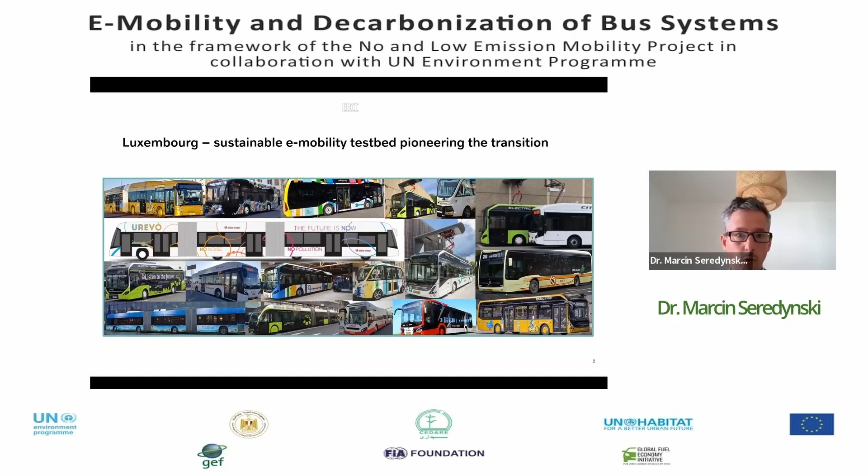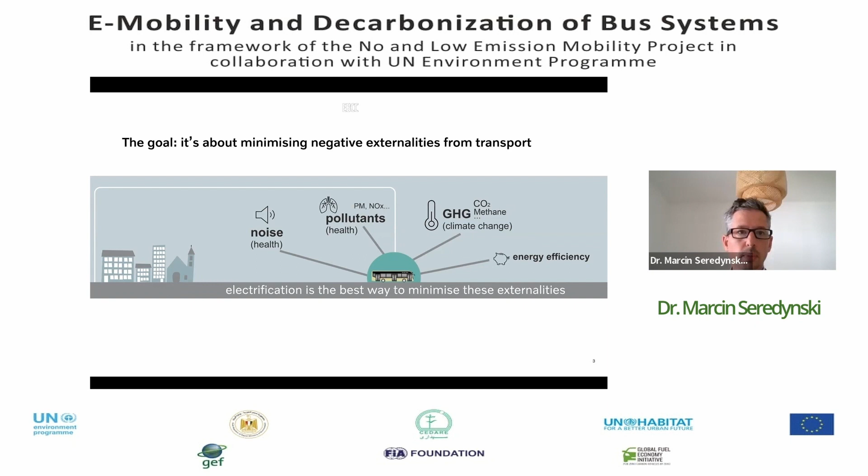So the first question that we asked ourselves is really, what is the purpose of using taxpayers' money for these newer, more expensive technologies? Of course, the answer is that it's really to minimize the externalities from transportation. So it's noise, pollutants, greenhouse gas emissions, and to improve overall energy efficiency. Each of these externalities has a slightly different meaning, but today we know that battery electric vehicles are the one and only best solution really to address them.

However, there's a quick note about tailpipe emissions, because there is a lot of confusion. If we talk about tailpipe emissions, then there is a huge improvement which comes with Euro 6 legislation. This means that Euro 6 diesel vehicles are already very, very low emission vehicles. So if we only look at these emissions, then switching to diesel Euro 6 vehicles will already be a huge step. So the benefits of electric vehicles are more on the greenhouse gas emissions and the noise.

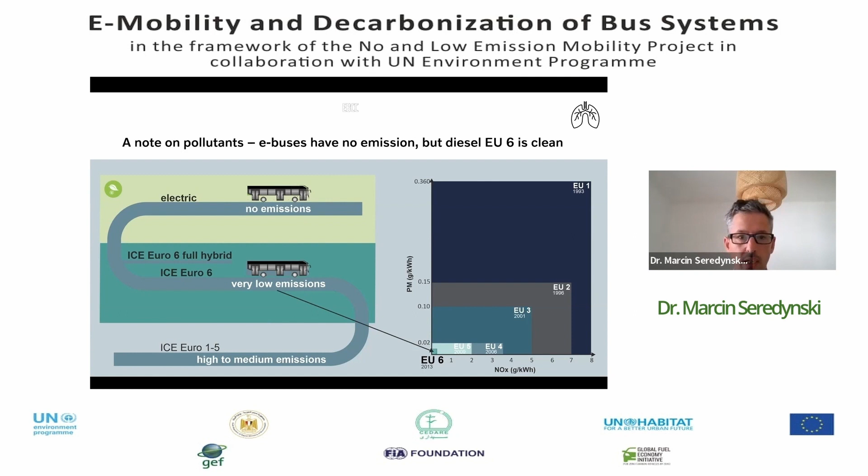And when we talk about greenhouse gas emissions, there's also a misconception. We always have to speak about not just what happens in the vehicle, because then of course with electric vehicles this is zero, but this is not the entire story. We have to see how the energy is being produced. This is why we have to have the well-to-wheel approach. And this is really the true impact when it comes to greenhouse gas emissions.

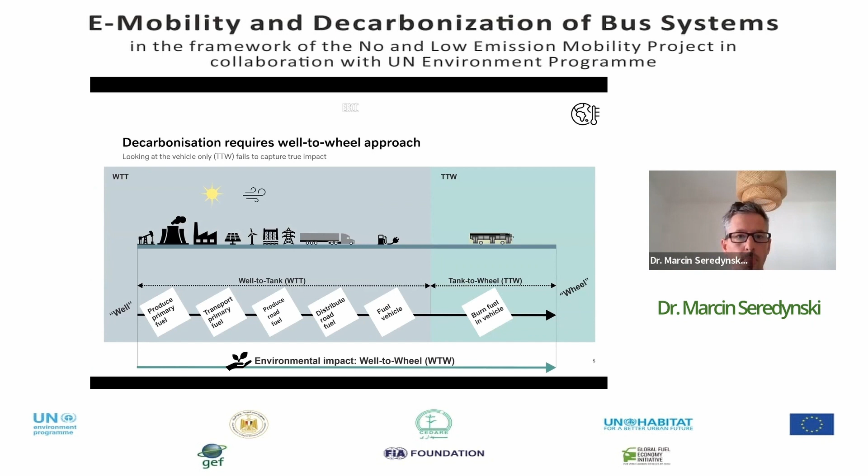And here you can see a comparison to a diesel vehicle of the emissions of different technologies. The diesel vehicle is our reference, 100%. We can see that CNG vehicles are even worse than diesel vehicles. With full hybrid vehicles, we can have around 25% reduction on average. And only battery electric vehicles can significantly reduce the emissions using the existing energy from the grid. The amount by which you can reduce the emissions, of course, depends on how clean the energy is.

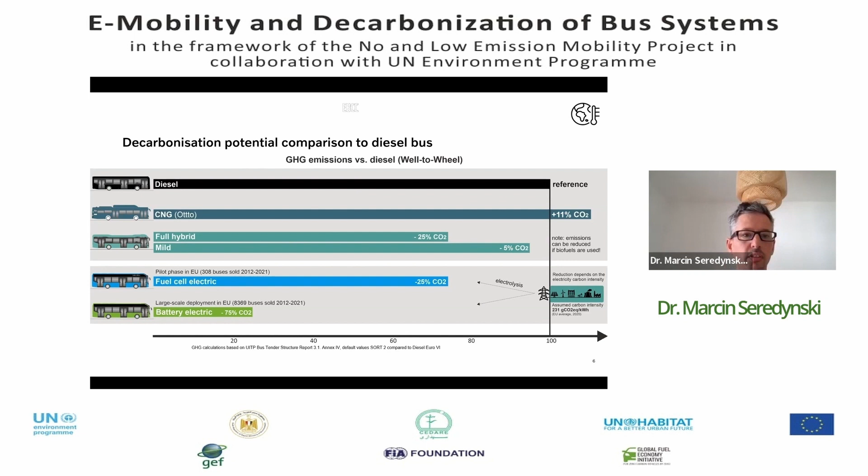So as our previous speakers mentioned, it's a journey. If, for instance, the energy is very, very dirty, if we take one of the European countries which has 700 grams of CO2 per kilowatt hour, then the benefits of electrification are relatively low. It's around 22% reduction, so quite a similar level to a hybrid vehicle, which still doesn't mean that electric is bad, but simply means we are not exploiting the full benefits. However, of course, the average carbon intensity is much lower than that.

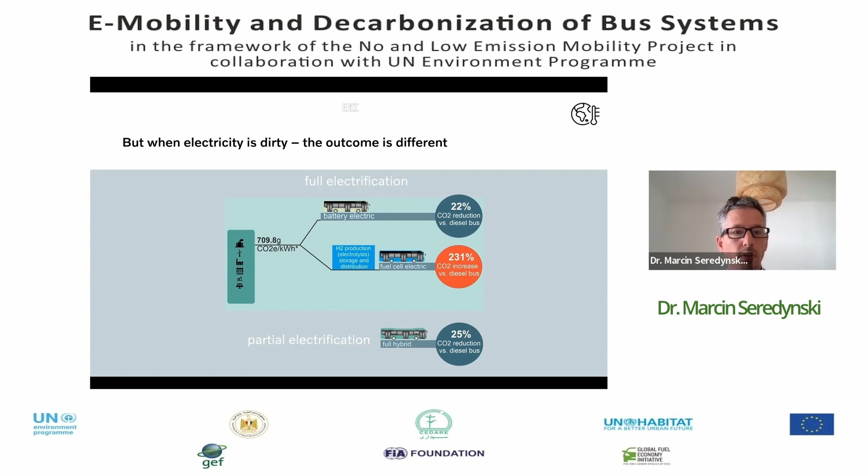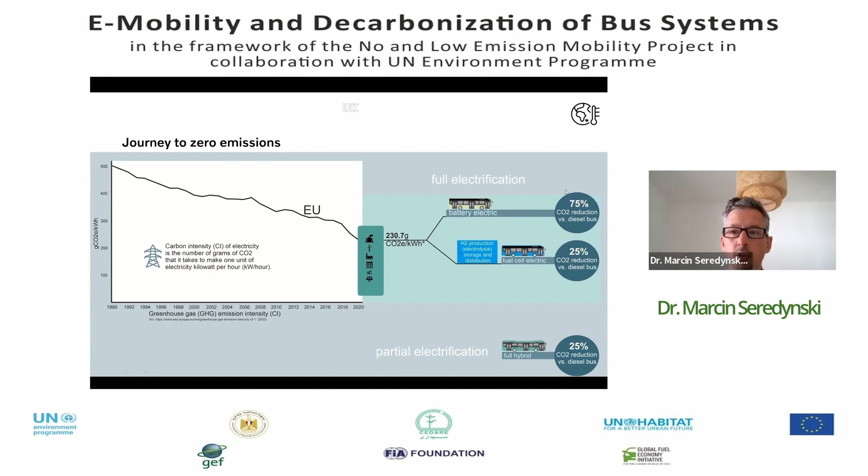So this slide shows the kind of journey in the European Union. You can see here how over the years the carbon intensity of the electricity has been reducing. Today we are around 230 grams per kilowatt hour. So this in the end can be translated to a 75% reduction versus a diesel vehicle.

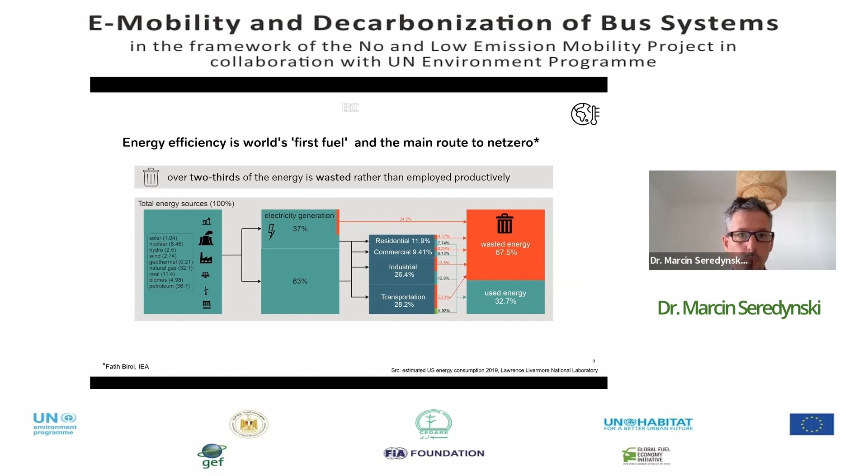Now, there is a lot of debate whether it's battery electric or fuel cell electric. And this is again where the question of energy efficiency is a key factor. If we compare the efficiency of fuel cell electric vehicles and battery electric vehicles, we see there is a huge difference in the amount of energy that we would need to push to the vehicle from the grid to run the same vehicle.

For instance, this would be the amount of energy that we would need to run a bus in Luxembourg for one day. For battery electric, we would need below 400 kilowatt hours of energy, and for fuel cell electric, this would be more than 1,000. And today we know that electricity is a scarce resource, and moreover, renewable energy is very, very limited. So we cannot really afford to lose so much energy today.

In the future, it will be different because over time we'll have more and more energy surplus. So we will be able to produce green hydrogen and that will make sense, but this is really far in the future. And of course, maybe this green hydrogen will not be used for transportation, because in transportation, especially in the cities, we will have good alternatives, but it will be more used in industries where we do not have alternatives, like steel or cement.

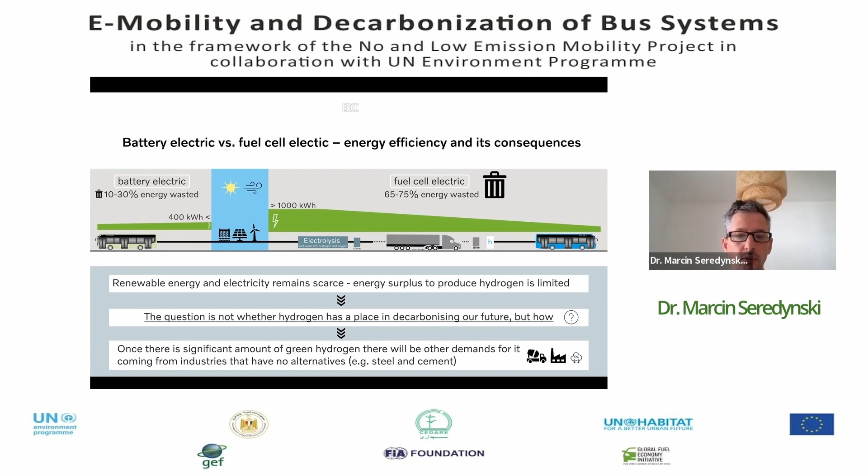So going back to deployment. In the end, having one, two, three electric buses is an easy thing. Luxembourg started with very few vehicles, but it starts to be challenging when we have to integrate the whole fleet. This is where we have to look at the full cost model and all the question marks that appear: when do we want to charge, how often, and what the charging infrastructure is going to look like. Here we see an example of more than 100 articulated electric vehicles delivered in Sweden. Integrating this into the network is a really challenging task and requires a lot of competence to do it in a cost-efficient way.

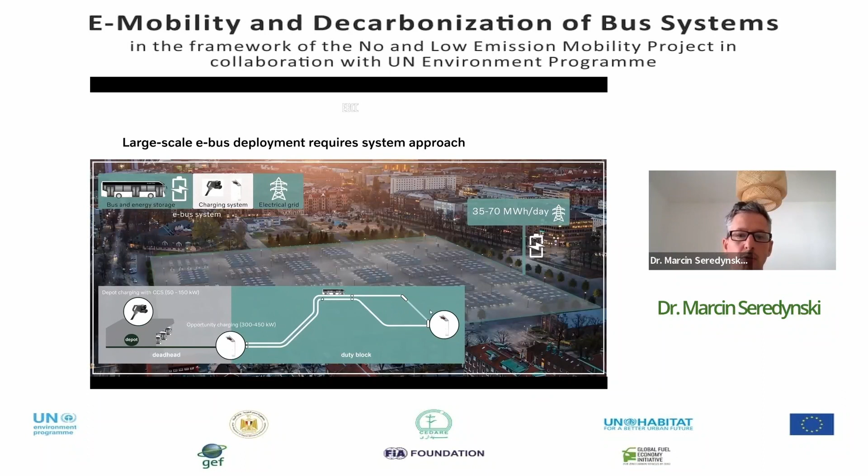Today in buses, as previous speakers mentioned, it's a combination of depot charging, so CCS2, and opportunity charging stations. In Europe, we see that many operators try to go for depot charging, but I believe this is really not the best solution today, and not even in the future. It's always good to have certain infrastructure distributed in the city for many reasons, and I will show you why in the next slides.

One of the challenging elements of electric vehicles is that there is quite significant variability of energy consumption as a function of temperature. When it comes to the cost of driving, electric vehicles are very efficient. The cost of driving, you can see, is below 1 kilowatt hour of energy per kilometer, so less than 10 liters equivalent per 100 kilometers. This is very low, so these vehicles are very energy efficient.

And because they are so energy efficient, we immediately see the cost of climate and the cost of heating. We didn't see it with diesel vehicles because this cost was well hidden in the expensive cost of driving the vehicle. But now with very efficient electric vehicles, the cost of heating or cooling is very pronounced. It becomes really evident at high or low temperatures. For instance, with 35 degrees outside temperature, the cost can practically double compared to the optimal cost when we drive at around 15 to 20 degrees. And this is also where we see the difference between high and low commercial speed.

So this cost will be very, very evident with very low operation speed, like for instance, with 10 kilometers per hour. And this is why I think these BRT systems are also very important. They provide extra hidden benefits. Because of the higher commercial speed, the cost of cooling will be much less visible in the daily operations. So that's also a very, very important element of BRT systems.

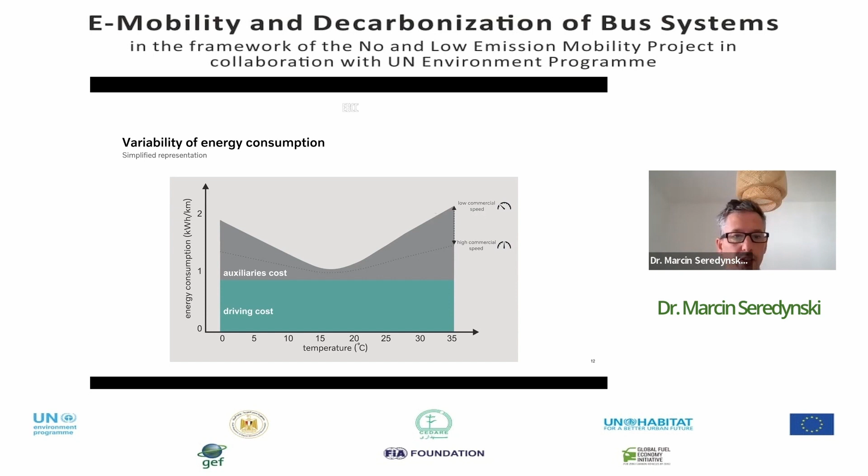So because of this variability, there are a lot of question marks about how to make the best optimal choice to integrate those vehicles. For instance, if we take the case of an electric vehicle that drives 250 kilometers per day, in most cases our energy consumption would be less than 300 kilowatt hours per day. But of course, sometimes it could be very hot or very cold, and this can double.

And so the philosophical question is: do we want to go for the highest battery capacity that will be ready for all the worst cases, or do we want a capacity scaled for the majority of consumption cases, and just add opportunity charging? Luxembourg has decided to go for solution 2 because it's more cost effective, more robust and scalable. But of course, it depends on many situations. The advantage of the first solution is convenience, but convenience sometimes has a hidden price.

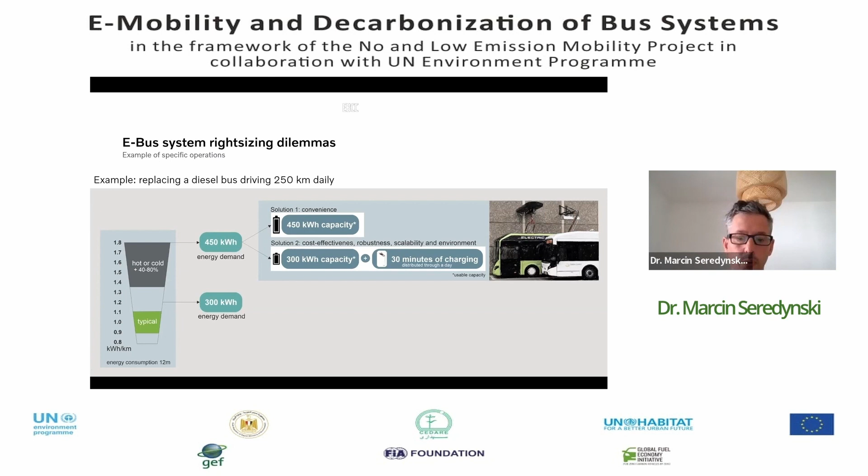So now there has been a question about the range of the vehicles. Where are we? This slide shows you how the average range of electric vehicles has been increasing. The first electric vehicles in Luxembourg were delivered around 2017, and they had a range of less than 100 kilometers. So you had to charge them quite often, and this was very complex to integrate them into operations.

Now, the vehicles on the market today have an average range of 250 kilometers. However, this assumes an average consumption of 1.2 kilowatt hours of energy per kilometer. Of course, if it increases with very hot temperatures, then our 250 kilometers goes down to 150, even 100. So we have to keep in mind that average values are not the best representative.

However, we know that in the years to come, the range and capacity are going to increase. So we'll see buses on the market which will be able to run the full day of operations without extra charge. Nevertheless, it still doesn't mean that we don't want opportunity charging stations, because for robustness and for cost efficiency when it comes to energy, this is a really important alternative.

So I think one of the important elements in the electrification process is the power sector. This is a key player in discussing electrification, because the power sector will be able to tell about the electricity pricing structure and about the availability of power in certain areas. So that's very important.

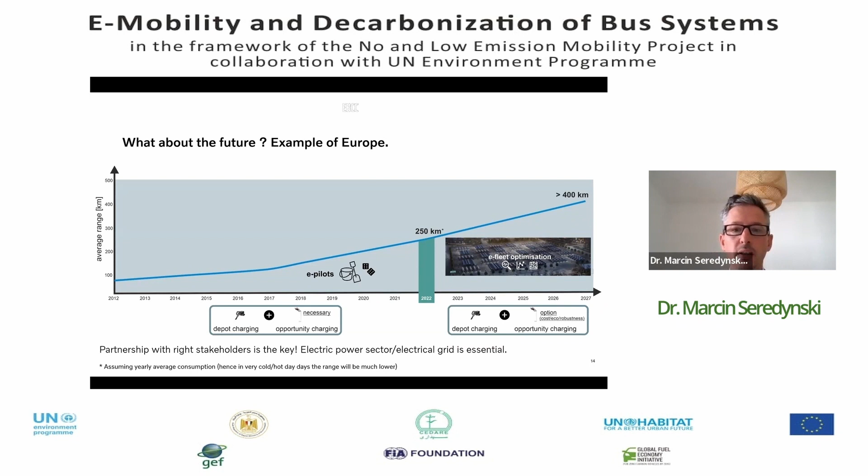And last but not least, today we have to keep in mind that the majority of the commercial offer of electric vehicles works very well until around 35 degrees. Beyond that, it becomes quite challenging. So I think it will take 2, 3, 4 years before there is a strong, competitive commercial offer in these difficult conditions.

Last but not least, we have to keep in mind that the electric or clean bus is just one of the many elements of the puzzle of sustainability. This allows us to make direct reductions of emissions. However, the main path to reduce emissions is by making public transport more attractive. In fact, an electric vehicle stuck in traffic is not an attractive alternative to passengers. It's not just about the bus, it's about the whole system: the priority bus lanes, the BRT system. Only the combined effect of all these technologies can really achieve the total reduction of emissions.